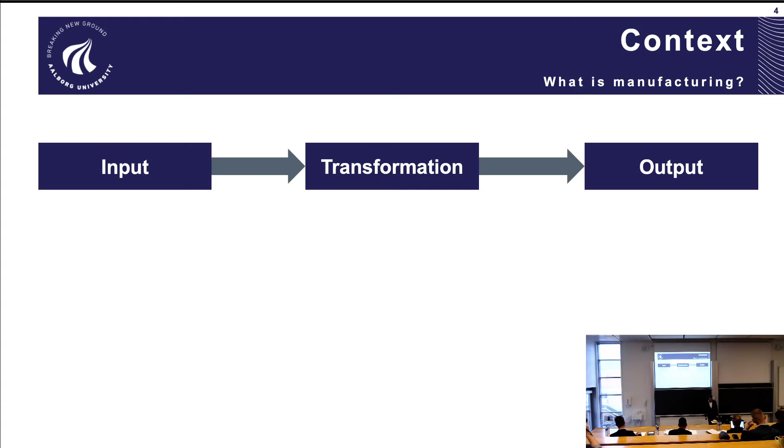At its core, manufacturing is just the transformation of an input into an output. These transformation processes happen all around us constantly. They occur naturally, or we can manipulate them as humans to get to a certain end result that we desire. This particular kind of transformation process that we manipulate is what we call a manufacturing process. These manufacturing processes take an input in the form of materials or components, and transform them into parts or products.

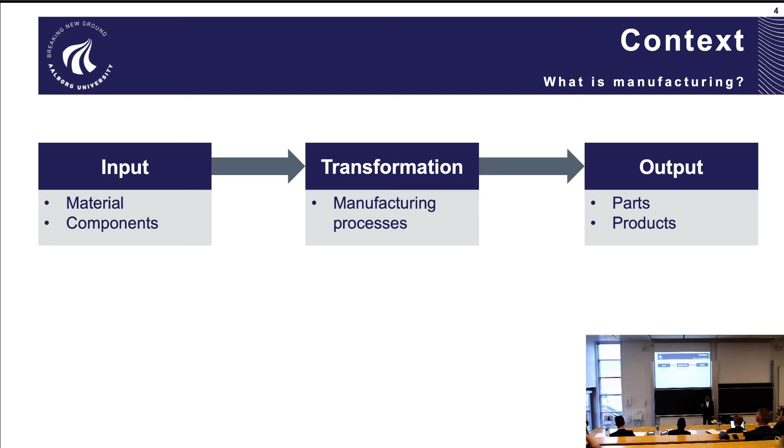And an example of this can, for instance, be: the end result that we want out of this is a set of Lego bricks, or a collection of Lego bricks of various colors. In order to get there, we need an input. In this case, our input is a set of polymer granules. And these polymer granules are basically plastic pebbles, fairly small.

We put those into an injection molding machine here. We heat it up, we put them into an injection mold, basically, and then we cool it down, and then we have our final Lego bricks afterwards. So the actual injection molding machine, that's the equipment that carries out our manufacturing process, while the actual process itself is the heating and the cooling and the shaping of our materials.

And in some cases, like this, the injection molding machine is considered a somewhat advanced piece of machinery. There are obviously more advanced pieces of machinery out there, but there are also far simpler pieces of machinery. And these manufacturing processes can definitely be carried out by very advanced machinery, but they can also be carried out with very simple tools done manually. So for instance, when you assemble a chair with a set of screws and a screwdriver, that's also a manufacturing process, and it's a fairly simple one.

But when we are looking at more complex products, we're going to eventually need more advanced machinery, more advanced techniques in order to get the level of quality that we actually desire of our product, and to actually be able to manufacture the product with the technology that it needs. And in certain cases, we'll also need more than just one transformation process, because one transformation process can transform one input into another output, but we might need to go more steps to actually get there in the end.

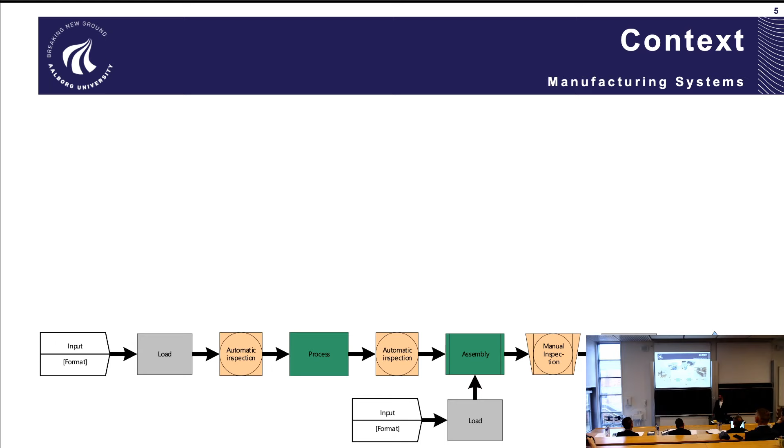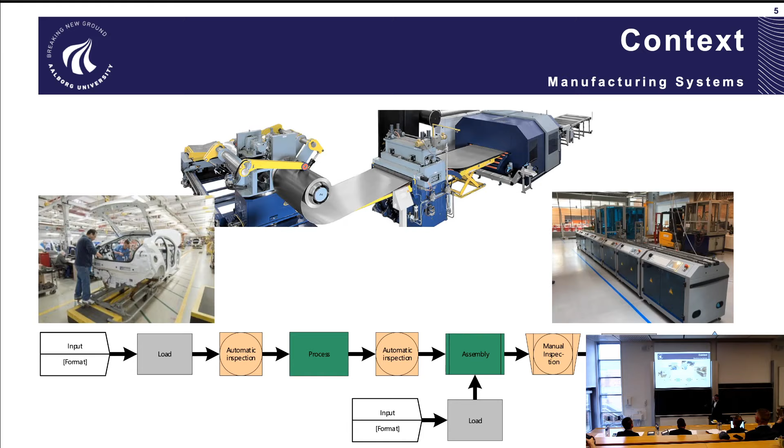And that also means that each of these functions can be carried out in various different ways. So there are various different physical entities that can carry out a specific process. And that means we get a lot of different physical instantiations of manufacturing systems. They can look in a lot of different ways. So these are just a few examples of some of them. The one at the top here is a very integrated one, where we basically have a roll of metal with various operations being performed after it's been spooled out to get to our end product, which is some sort of new shape, new product.

We have an assembly line here, which is a combined manual and automated assembly line, where we have some automated movement of the actual car chassis, but we have some manual work done on it as well. And the last one over here is the manufacturing system that we have at our lab, right over in Fibigerstræde 14, so you can actually see that afterwards. But this one is specifically built with some fairly advanced technology in order to allow us to move things around in it and to change the actual capability of it. So this one, we can actually change the shape of ourselves, whereas the other ones are slightly more locked down.

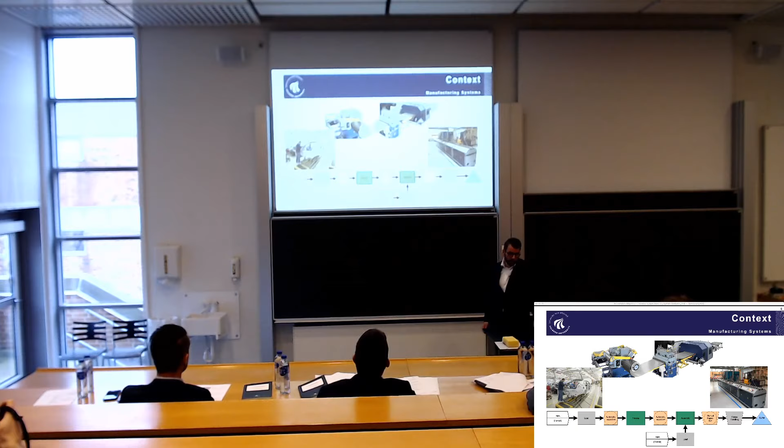But the key is that the manufacturing system is actually just simply the physical equipment that carries out these operations that we actually need to finish our product, or to get the product that we need in the end. And there are huge varieties of these, obviously, more or less complicated manufacturing systems.

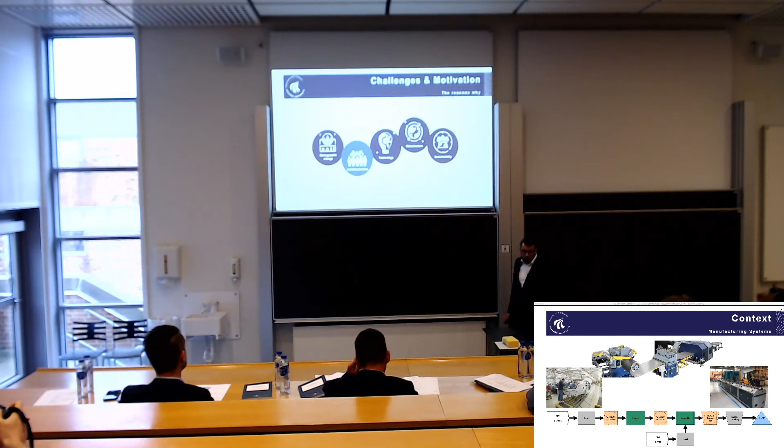But why even work in manufacturing? Why even work with manufacturing systems? And there are a lot of reasons why, actually. I'm not going to go massively into the statistics, but according to our statistics for Denmark, a lot of our GDP is actually generated through export, and a lot of this export is generated through manufacturing. So it is a fairly important field in Denmark specifically as well.

We also have a lot of people employed in the manufacturing industry, and with increasing outsourcing, well, this number is starting to dwindle a bit, and we'd really like to keep manufacturing in Denmark as well, because we are actually pretty good at it, but we obviously want to be even better to keep the jobs here as well and keep all the industry in Denmark.

And for the challenges and motivations that I've considered for manufacturing systems or for manufacturing in general, these are 5 broad categories that I've been looking into a little bit. I'm going to go through all of them very briefly, and then I'm going to focus on the one that I've actually been working on, which is the highlighted one here with individualization.

But the demographic change, to start there, well, we're seeing people are living longer, obviously, that's a good thing, but that also means they work for longer as well. That means that we have more supporting tech and more assistance that the workers will eventually need. It also means that re-education will become more and more important in order to get people to work different jobs. As the job functions start to change, we need to re-educate them as well so they can carry out their tasks.

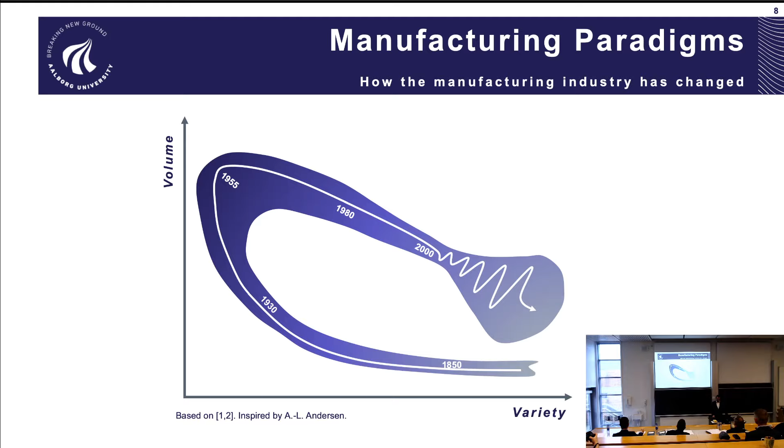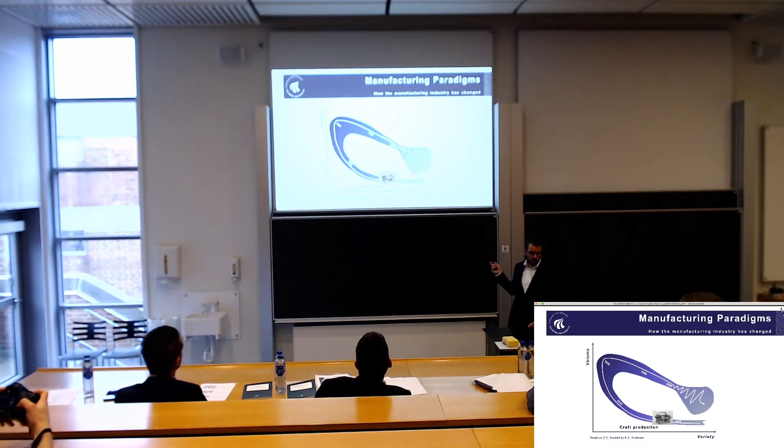This graph basically shows how the industry has changed based on the variety and the production volume. The production volume is the amount of products that are being put out, essentially, the number of products that we actually manufacture. As we start down here in the 1850s, that's quite a while ago, that's where we initially had craft production. So that means we had a very high variety, but very low production volume.

And that's because the people who actually worked this craft production system and actually manufactured the products were very, very specialized workers. So they honed their craft, they were actual craftsmen, they spent a lot of time specializing and learning their actual craft.

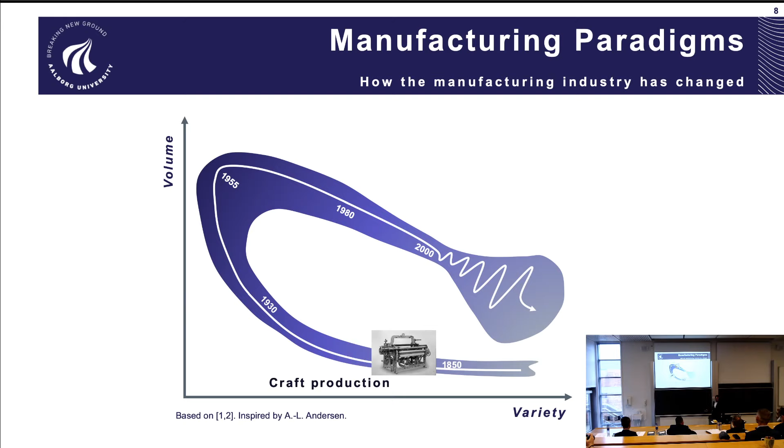But as the population grew, we needed a higher production volume, and that moved us on to the actual mass production era. The mass production era was where we started to standardize more components of our products. We started to be able to manufacture these products much, much faster because of the standardization. So we started to replicate our essential products and started producing more of the same rather than making a unique product for every single person.

And one of the things this is usually attributed to is the Ford Model T, where they built one of the very first automated manufacturing systems or production lines, where they had automated conveyors and a lot of people carrying out repetitive manufacturing processes in order to churn out a lot of near identical cars, basically.

And this manufacturing paradigm is basically still in use today. We still see it at car manufacturers as well. They have introduced a lot of new technologies to be able to manufacture more variety, because we are starting to see this trend towards decreased volume and increasing variety again.

And what we're moving into now is actually the mass customization paradigm, where we have a collection of products that we basically want to be able to customize to as many people as possible. That also means that we want to be able to parameterize the actual needs or the actual features that we have. We need to know exactly how we can change these features to fit various people or various groups of people, essentially.

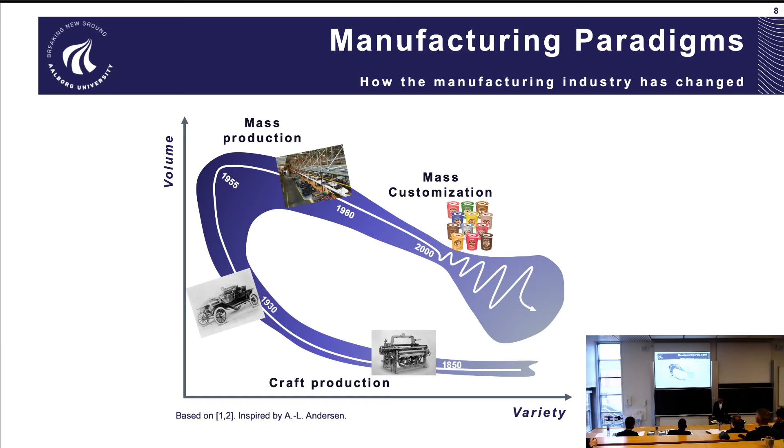And in this case, for mass customization specifically, we want to be able to combine the economies of scale with the economies of scope. The economies of scale is what we've gotten from the mass production era over here, where we are able to manufacture so many products that we can make them very, very efficiently. The economies of scope is basically introducing more variance in order to meet the demand.

So we want to be able to combine these two and get the most of it as much as possible, at least. And for each of these paradigms, there are some types of manufacturing systems that work with each of them. These have been developed to be the most efficient within their specific paradigms. The two I'm going to be focusing on today are the dedicated manufacturing systems, which were developed for the mass production era. This is where we have a very low variety, but very high efficiency. So they're basically dedicated to a few product variants or maybe only one.

Then we also have changeable manufacturing. This is basically an umbrella term covering a number of manufacturing systems that have various kinds of technologies. But this basically means that we can change the manufacturing system to fit our specific needs. And changeable manufacturing is essentially what we're hoping to achieve with this whole work with manufacturing system platforms and everything.

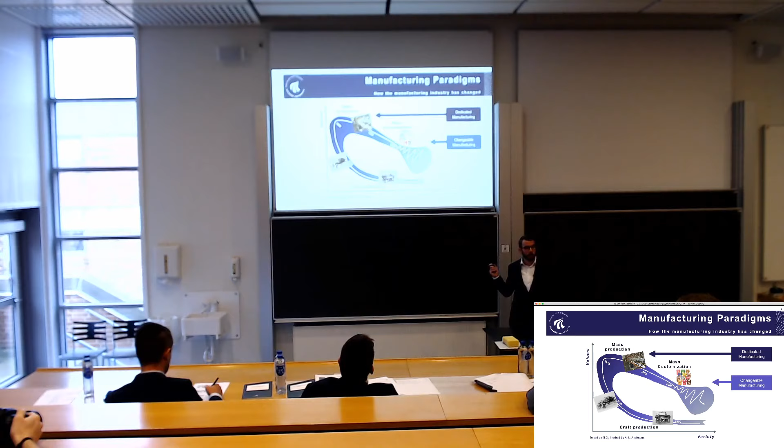So just a little bit more about these types of manufacturing systems. The dedicated manufacturing system up here is very high efficiency, very low variety. So very few variants, but we can produce a lot of them. An allegory to this is, for instance, the ratchet ring wrench, which is suited for just one task, but it's very efficient at it. You don't even have to lift the wrench to carry on with your operation, but it only fits that specific type of nut or bolt.

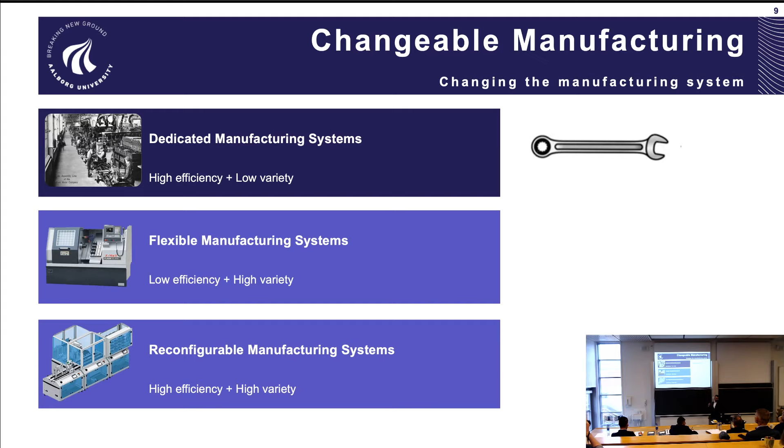For the flexible manufacturing systems, we have comparatively low efficiency, but a high variety. So we can do a lot of different tasks, but it doesn't do any of them very efficiently. So we have a lower production volume output from these types of systems, basically. An allegory to this would, for instance, be the adjustable wrench. You have to lift it every single time you make a turn, but you can also adjust the wrench itself to fit a number of different bolts or nuts.

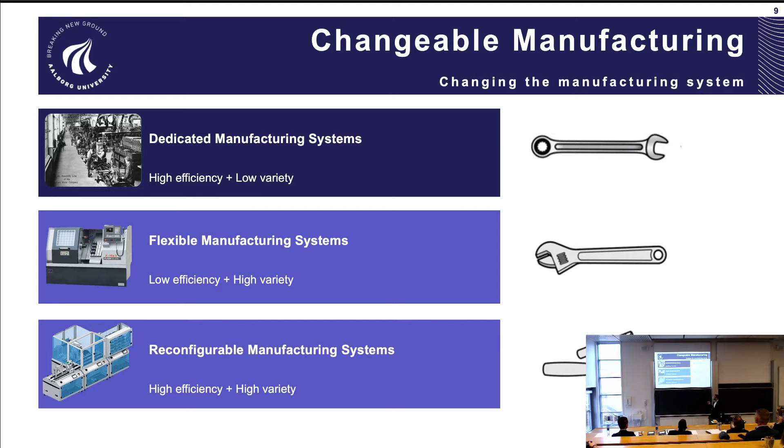And the reconfigurable manufacturing system has a very high efficiency and a very high variety, essentially. An allegory for this is the socket wrench, because like the socket wrench, the reconfigurable manufacturing system allows us to change various components of the system itself. So we can exchange components of the socket wrench to make it fit various things, and it's still very efficient at what it does. The same goes for the reconfigurable manufacturing system.

And this might make it seem like the reconfigurable manufacturing system is the best solution in all cases. That might not necessarily be true, because if you don't need the variety, why bother developing a reconfigurable manufacturing system if you only have one product anyway? So you still need to scope in and figure out what sort of changeability, what sort of changes do I actually need for my manufacturing system. Because it does come with a high cost to develop this. It takes a lot of time. It's still not easy to do, but we're trying to get there with all this research into reconfigurable manufacturing systems.

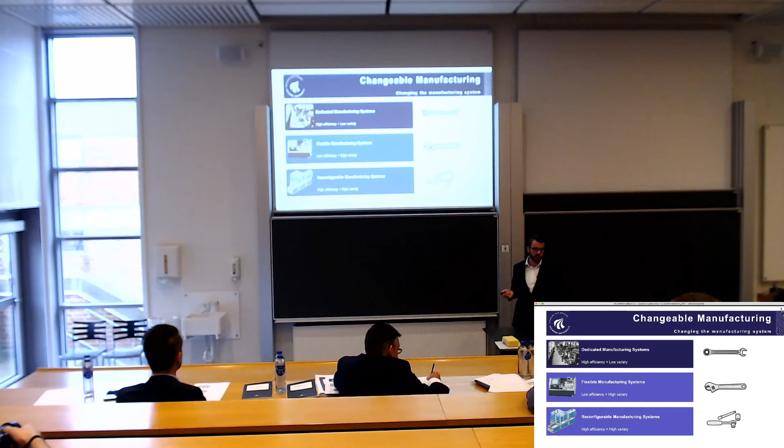And so these are just two of the types of changeable manufacturing systems that we're considering, and this is what I'm going to be talking about today. What we're hoping to achieve is these kinds of systems through platforms. I've mentioned platforms quite a bit, and now we're quite a few slides in, and I haven't actually told you what platforms are. But platforms are fairly simple. It's about locking down features in the product. So you answer these two questions basically: What in my product or my system can I actually change? What am I allowed to change? And where do I allow variety and where don't I allow variety?

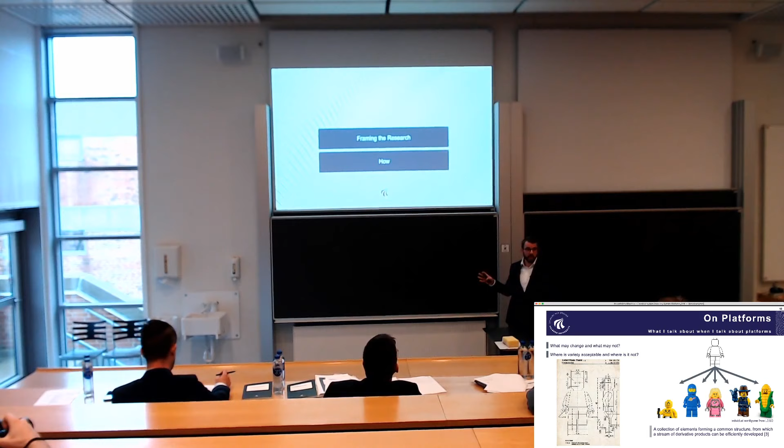Now we're moving into what I've actually done. This is some of the context, some of the first chapters in my thesis, essentially, where I talk about the background for it. But framing the actual research should give you an idea of how I've approached this problem overall. And it should set up the specific questions I've tried to answer a little bit more precisely, essentially.

So first off is the research objective itself, and that is basically to create and apply methods and tools for identifying, developing, and documenting manufacturing system platforms. And the outset I've taken to this is that it should be through commonality and standardization, because that is very important to platforms, that we know what our common ground is and that we can standardize this common ground. The specific approach I've taken to this is something called design science in information systems research. It's basically a framework for conducting research in information systems with a design science perspective.

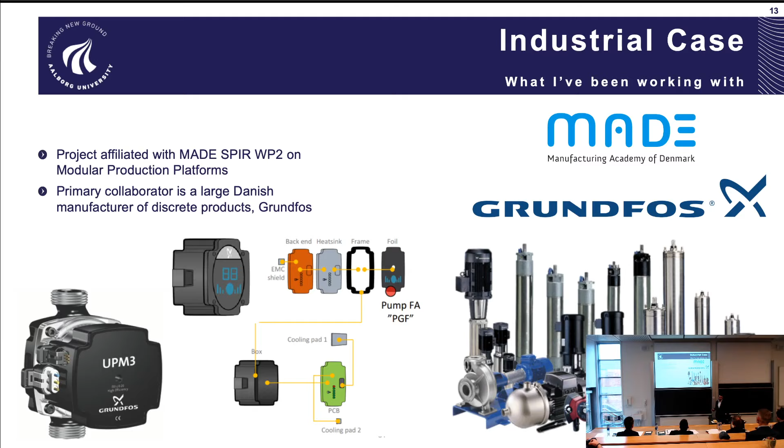Well, my project as a whole is affiliated with MADE SPIR Work Package 2, specifically on modular production platforms, which is very much what I've been working on. And my primary collaborator has been Grundfos. So they're a large Danish manufacturer of discrete products. And in case some of you don't know what Grundfos does, they basically make pumps, to put it short. And they're pumps both for the private consumer, but also for industrial applications of a huge variety of sizes and applications.

Obviously, I haven't been able to look at every single one of them. I've been looking at a certain subset of them. We started off with mainly small circulation pumps, specifically the control boxes for circulation pumps. And this is one of them, for instance. So that's about the size we've been working on, the manufacturing of these. And there's been a variety of other products included as well, but this has been one of the main ones throughout the entire process.

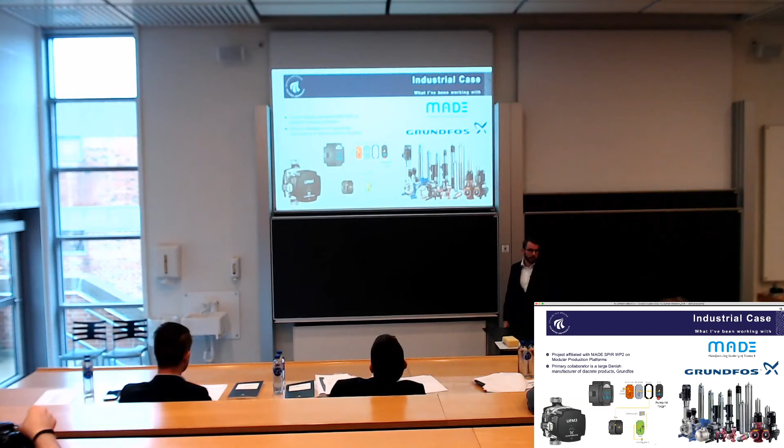With that, let's move on to the actual research questions themselves. So I've set up 3 research questions. For each of these research questions, there are 2 to 4 sub-questions, basically. And then I've written a number of papers, and each paper answers 1 to 2 of these sub-questions, and thereby they address the overall research questions as well.

So the first research question is basically, how do we develop manufacturing system platforms? How do we document them? And how can we use concepts from software systems in order to get there? So that's what I mentioned, that we need to take inspiration from somewhere in order to go further. And which challenges arise there, obviously.

For research question 2, it's basically about how can we classify manufacturing systems and their processes in order to get potential platforms out on the other side. I wrote 3 papers addressing that.

And for the last research question, it's basically on how manufacturing systems can be developed by taking into account the existing production landscape. So manufacturers, they always have existing manufacturing systems, and we don't want to necessarily scrap that. We want to make as much as we can of the actual experiences and all the machinery, equipment, and tools that they have for that.

And 5 of these papers are published. The last one is in press, so it's still not quite published yet, but it should be fairly soon. That was a very quick run through of the actual approach I've taken.

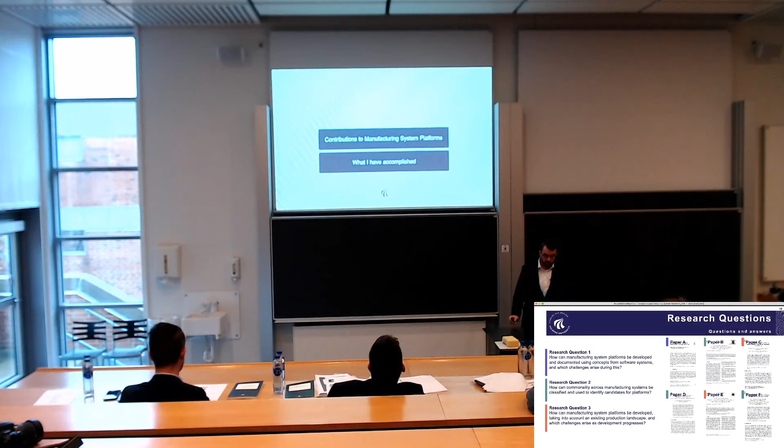So now we'll get into the things that I've actually been working on in the project, or the contributions that I've actually made. The papers themselves, the way they were set up on the previous slide, they were set up chronologically, and that's the same way they're included in the actual thesis itself. In my presentation, I've taken a slightly different approach because I thought this would make a little bit more sense.

But the first one we're starting off with is the actual challenges that we've seen when we've been working with platforms. So I've been working on platforms for quite a while. It actually started during my master's, or actually my second semester on my master's. So it's been ongoing for the last 4.5 years. And through this entire process, there's been multiple projects ongoing as well.

So the first project that I started working on was basically trying to figure out what are platforms actually. Can we use them for anything? Because it's something we've heard about, and it seems like it could be useful. But what are they actually? And how do we utilize them? How do we actually develop them?

In the second project, we started looking more into the actual identification of potential platforms. So we had a bigger scope, we had a bigger group of people that worked together on trying to find out which parts of our manufacturing system should be platforms, how we document them. We started including some co-development as well, since we included people from both the product development department and the manufacturing development department, in order to get these two things aligned with each other, because that is very important when we're talking platforms. We need to have these two departments aligned to be able to actually manufacture the things that the product development team makes.

And then, of course, we need to somehow develop and apply tools in order to create these examples that we actually need, so we can communicate to people how they're actually supposed to develop manufacturing system platforms. So these are some of the challenges I've been trying to address through this whole project.

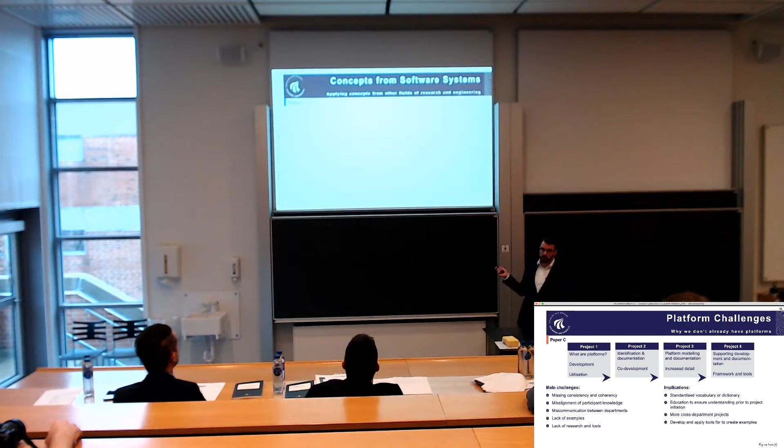So one of the first things I did, in order to get a better understanding of manufacturing system platforms and how we could attack this, was to look into software systems. And you might think, why even care about software systems? This is not what I'm working on, basically. But the simple reason is that software systems are quite a bit further than we are. They can make iterations of systems significantly faster than we can, because we are very much tied to physical equipment still.

And every single time we need to make a change to the manufacturing system, well, we have quite a significant lead time. So if we want to get through development processes quickly, we've got to start looking elsewhere to get some actually tested and applied methods in order to do what we're trying to do. And that's what they're really good at in software systems. So that's why we've been taking some inspiration from them, basically.

One of the things that we looked into was architecture; they talk a lot about architecture, and we do in manufacturing systems as well. We're not going to go massively into architecture, but one of the concepts that we've taken from there is something called views and viewpoints. The viewpoint is basically a way to look at a specific system. The view you get out at the end is basically the resulting look at your system. So a view is to a viewpoint as a program is to a programming language, essentially. So the viewpoint is a collection of ways to look at something. It's basically an outset or a perspective onto something.

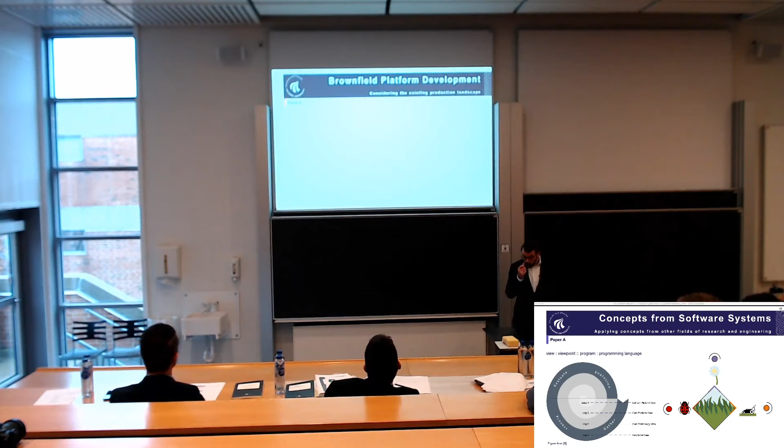This is one we developed in order to actually create these views and these viewpoints that we believed we needed in order to create platforms and in order to document platforms. A key takeaway from this is that it separates function and technology. So we need to make it clear that there's a difference between the actual function that we need to carry out and the way we carry out the function. And this was crucial in order for us to actually be able to compare all of our manufacturing systems that we have as well.

But moving on a little bit, talk about Brownfield platform development, because it's also fairly important to the manufacturer that all the work, all the systems they already have, they don't just go completely lost. And that's what Brownfield does. It takes into context basically the existing environment where you're actually developing your manufacturing system platform, as opposed to Greenfield development where basically everything is up in the air. You have no limitations. Essentially, you can develop almost whatever you want. Obviously, there are advantages and disadvantages to both these approaches. But Brownfield development in particular is interesting because we want to be able to reuse all the equipment that we already have.

So the first step to this is essentially a prerequisite to actually starting this whole process. It's not actually part of the Brownfield development approach that I've outlined, but it's the assessment of changeability requirements. So what sort of changeability do we need? How much flexibility do we need? Do we need reconfigurable manufacturing systems, or do we need something else entirely? That's a prerequisite for starting this. It's still included here because it is fairly important, but that's not what I've been working on.

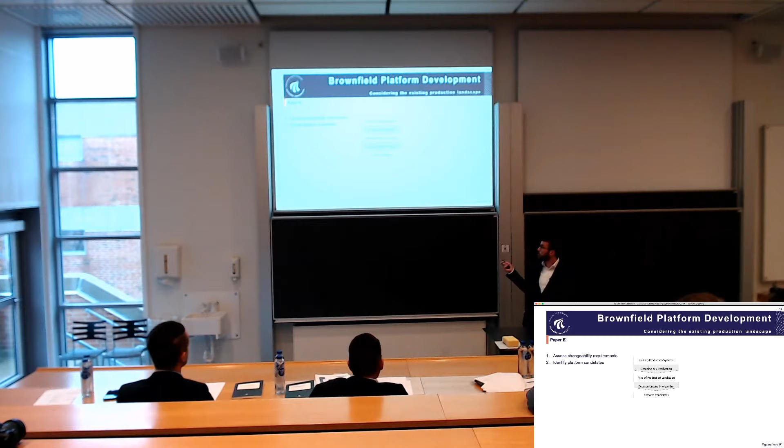After that, we have the identification of platform candidates. So these are potential platforms based on your existing manufacturing system that you could keep working on, keep developing into platforms and base new manufacturing systems off of. That's also a fairly simple process here. You take your existing manufacturing systems, you group them, you classify them, then you end up with a map of your actual production landscape. Based on this, you apply some decision criteria and algorithms in order to identify these appropriate platform candidates.

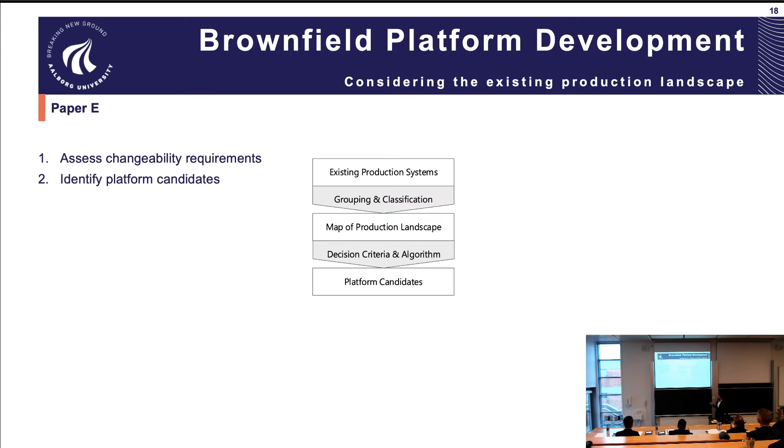Once you've identified these candidates, well, you go through another series of steps to keep developing them, of course. So for each of these next 4 steps, from 3 to 6, you basically carry those out for each individual platform candidate that you've identified. And if for some reason you find out during step 4 that this platform candidate doesn't actually make sense to keep developing anyway, well, you can still just scrap it at that point and move on to the next candidate instead. But we go through, basically, we define the essential functions of the candidate. That means what is it actually supposed to be carrying out.

Finally, we start with governing and maintaining all these platforms. That's what you do for basically all of your platforms, the whole collection of them that you have. Because we need to maintain them, make sure that they're up to date and that their existence is communicated out elsewhere. And all of these are obviously not rigid prescriptions, they're operational guidelines, so that means there's still some need for flexibility in these. So you can move steps around a little bit, or skip a step maybe and go back to it later on.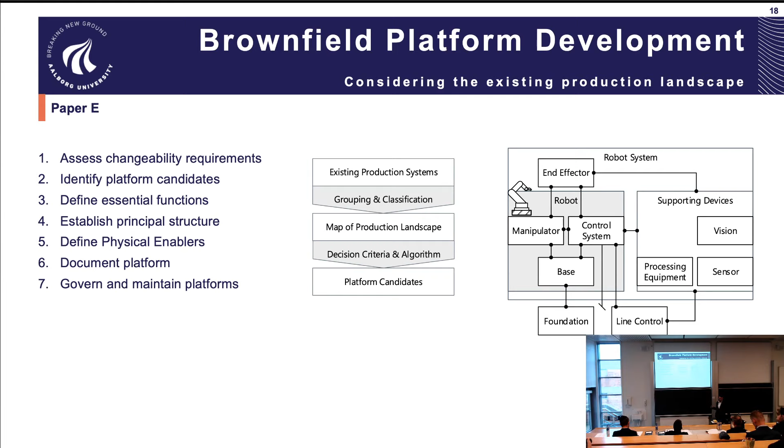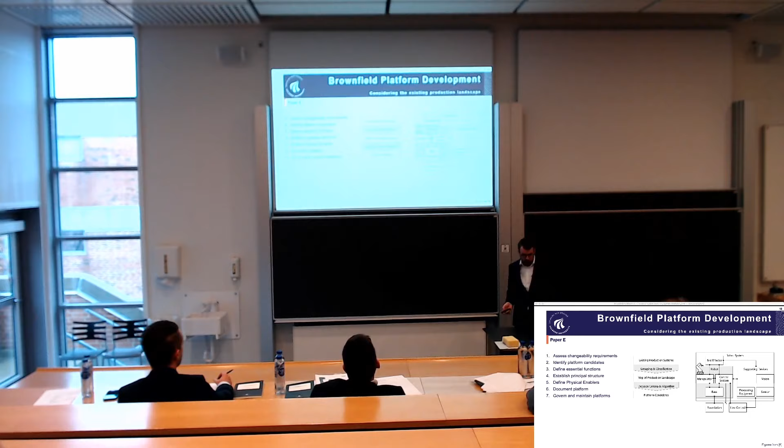But the reason we want to do this brownfield development is essentially that we want to be able to incorporate the experiences from experts and the people who've actually developed the systems and worked on the systems in order to help the acceptance rates of manufacturing system platforms in this company. This one is one of the ways that we've been trying to actually accommodate this step with grouping and classification, because the thing that I started looking into more and more was the actual identification of platform candidates.

So I created a consolidated classification scheme, basically for manufacturing system processes or for production system processes, but including the manufacturing processes themselves, also material handling processes where we move stuff around. It also includes some other processes such as test and inspection and control and planning, but we're not going to get massively into that today.

The way I did this was basically by searching through a lot of the existing classification schemes that I could find, basically as many as I could find, and then consolidated them into one classification scheme in order to create this comprehensive classification scheme that I could use to classify the processes in manufacturing systems.

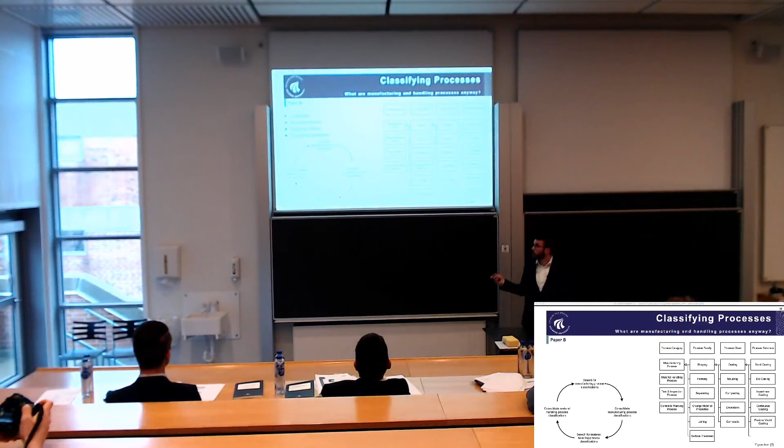The end result, as of my paper written, we ended up with these 4 main categories. We had 16 different process families. So these are split up into different categories. Then we have 53 process classes and 232 process subclasses. And this one is going to keep growing as more processes are added to it and as more work will be put into the test and inspection and control and planning processes, because that's still something that needs to be looked into.

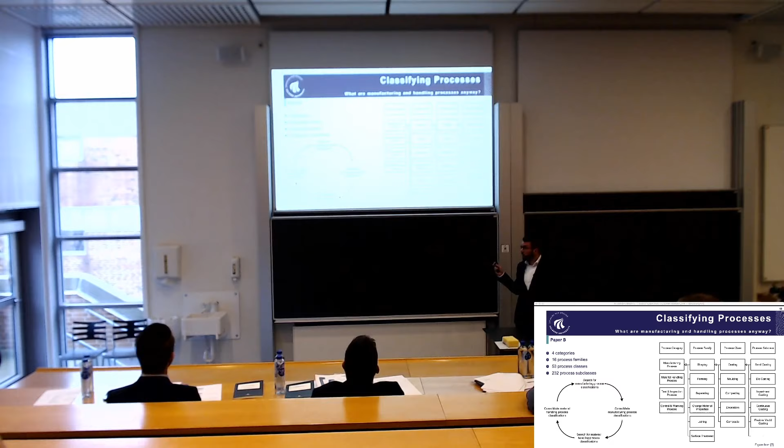But this is just one way to actually describe a part of the manufacturing systems themselves. There's still quite a bit more to it than that. There are a lot of other characteristics that we can't capture just by looking at the processes themselves. So that's why I developed a classification code to actually document or to capture these characteristics.

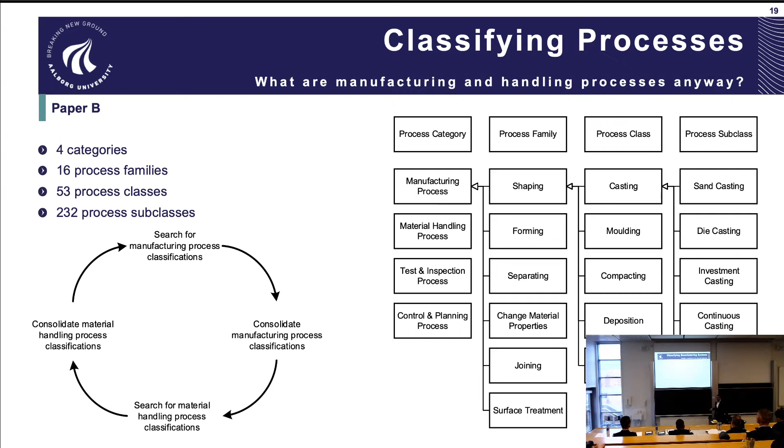And what we're looking at here is a classification coding scheme which basically describes the entire manufacturing system, both on a system level and on a cell level. So that means the system as a whole, but also the individual stations that carry out the manufacturing processes. And we look at all these things both with a physical perspective and a logical perspective. The physical perspective means the actual ways things are carried out, the actual equipment itself, whereas the logicals are more intangible. So that's where we describe certain other things that might have driven the design of the actual manufacturing system itself.

This is just a small example of it. The actual code itself consists of 25 digits, where you use one digit to represent a specific characteristic of the manufacturing system. So in this case, the manufacturing system was designed because we had a new product. So we need a new manufacturing system to make this new product. The product itself is fairly small and the production volume is high. We have hardware variety in it, so we need the manufacturing system to be able to manufacture products with a different hardware variety. And this is just a shorthand for the location of the actual manufacturing system itself.

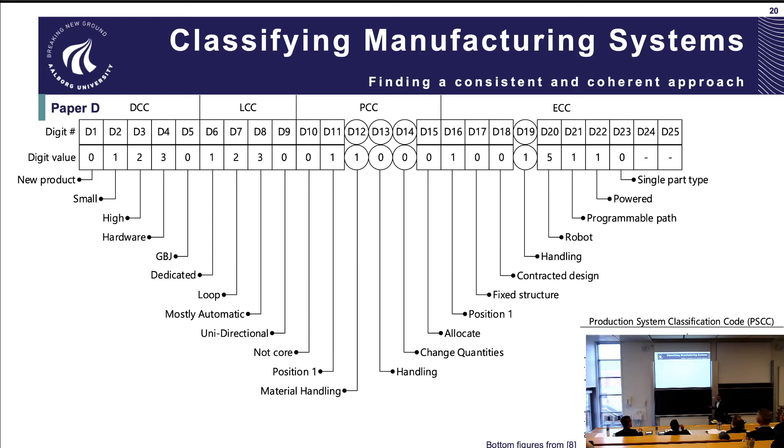And the classification code basically continues like this. We keep adding stuff to it in order to actually describe. So this basically describes the system, the layout of the system. Then we move on to describe the individual processes of the system. And finally, we describe the actual ways this specific process is carried out. And we keep doing this, adding more and more processes until we have basically an entire block of code that describes the entire manufacturing system itself.

So when we have multiple of these, I don't know if they can be seen because of the angle, but when we have more of these code blocks, we can start comparing them to each other. And by comparing these, we can start to locate the good solutions or the bad solutions and figure out what actually works in our manufacturing systems. Where have we tried to carry out this process in various different ways? And in which cases has it actually worked properly?

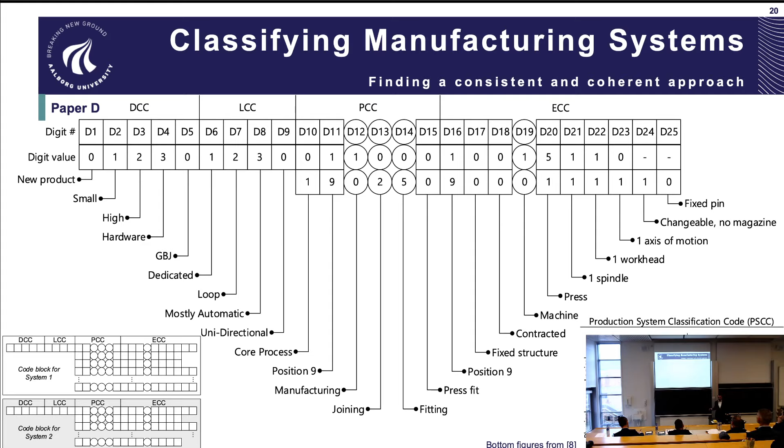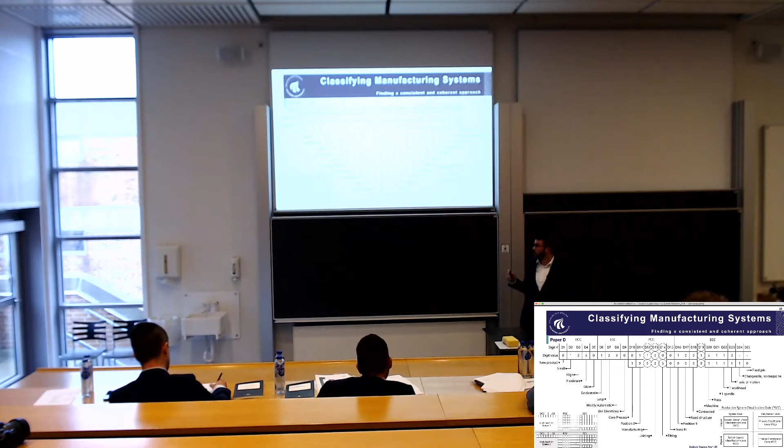There's a lot of applications to this, but one of the key things is that it's very, very difficult to implement in this current state as well. We need to somehow make it a little bit more user-friendly to get a higher acceptance rate on it. It does take time to implement this, but it can be a very powerful tool as well.

Actually, we tried using it in one case as well, where we took 8 manufacturing systems and coded them according to this classification scheme. Then we used 3 drivers: the frequency of a process or an enabler, how often they occur; then the prevalence, so how many systems they actually occur in; and a ratio between how many different processes an enabler carries out and how many instances there are of the process, and so on.

So with that, we got basically a ranking of all the processes and the enablers that were used in the manufacturing system themselves. And from this ranking and from these scores, we can maybe recommend some potential platforms for the future. These are just 3 of the ones we looked at basically. The allocation process up here, which is a material handling process, because it basically scored top in almost everything.

We also looked into the robot itself, because it is fairly frequently used as an enabler, and it carries out a lot of different processes as well. We also have the tester, which is used in every single manufacturing system, but there's a lot of different instantiations of this tester, and we want to be able to standardize the way this tester works, basically.

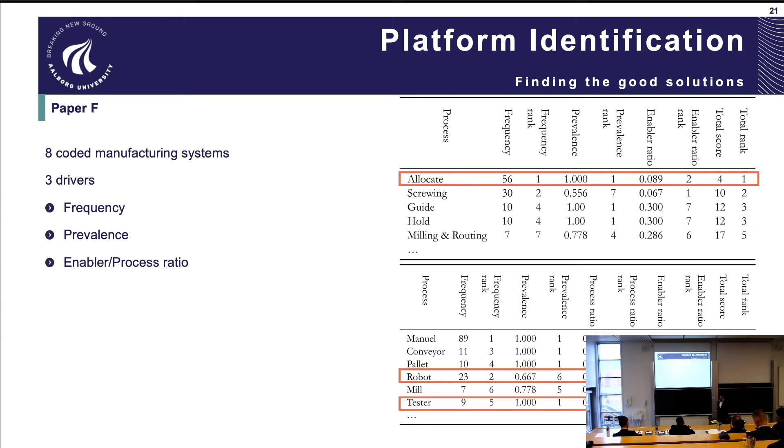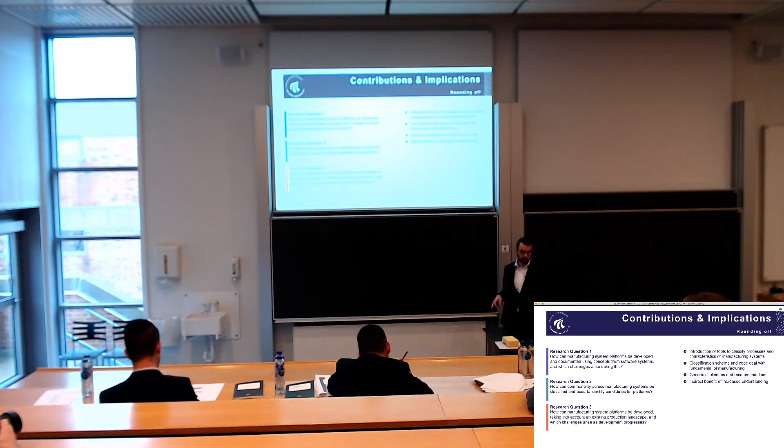That was the end of the actual contributions part, so I'll be moving on to the concluding remarks, because we are nearing the end now. I've tried to answer these 3 research questions, obviously, through my 6 papers. And I think I have gotten around that pretty well. There are some other conclusions that can be drawn based off of the work I've done as well. So one of the key aspects that I've done in my research is basically the introduction of tools to classify the processes and the characteristics of manufacturing systems. That's one of the key contributions that I've made as I see it.

And through customization of this scheme and of this code, you can basically apply it to almost any manufacturer. It doesn't have to be a large manufacturer, it doesn't have to be a manufacturer manufacturing pumps. It can be basically anything, because it is supposed to be flexible in this manner. Because they do deal with the fundamentals of manufacturing, actually. So they're not tied to any specific industry or any specific manufacturer.

We also came up with some generic challenges and recommendations that you should consider before you start actually developing manufacturing system platforms, because it is a lengthy process, it is a costly process. There's also an indirect benefit of working with manufacturing system platforms, and that is to get a significantly increased understanding of your actual manufacturing systems. What do our capabilities look like at the manufacturer? And you might be able to get a better grasp on what the production actually looks like.

Future research: there's still a couple of loose ends that could be tied up potentially. This is some of the things that I would like to continue looking into. The first one is actually a comprehensive framework for manufacturing system platform development. This is just an illustration of the elements it could consist of. But yeah, that's basically to make it easier to actually develop manufacturing system platforms, figure out which tools you need in which situations. The process classification scheme itself should also be turned into an ontology.

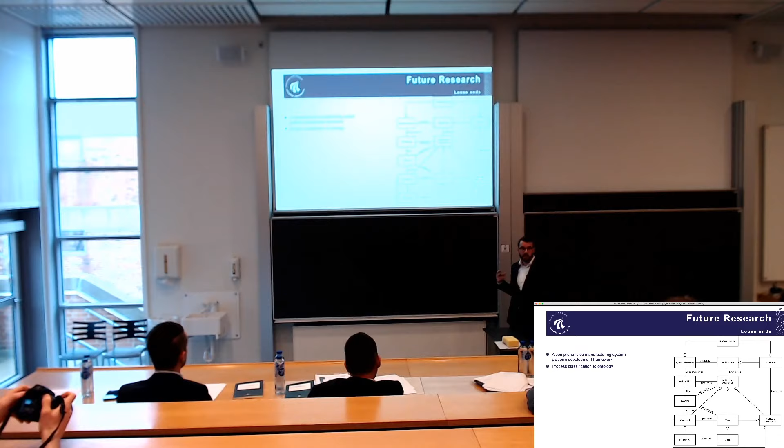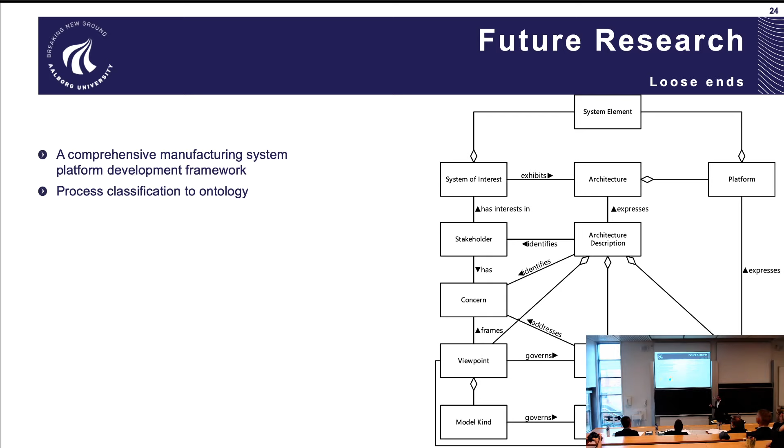That basically means enriching it with certain attributes, certain properties, so we can describe our manufacturing system in more detail based on the classification, and potentially develop some method for saying something about producibility or manufacturability of new products. There's also an app for the actual mapping and the classification of manufacturing systems, on whichever platform that we want to, basically, and also an algorithm for actually using this classification code to identify platform candidates. And the actual app and development on this is the subject of a future project as well. So there's going to be some work on that for sure.

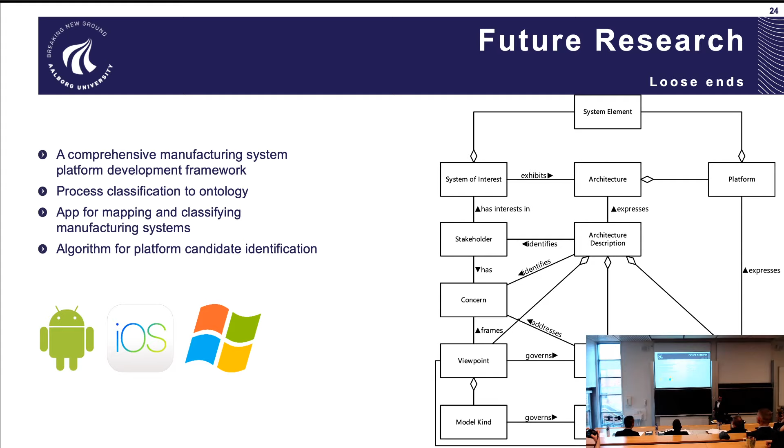And last slide, a few acknowledgements. Obviously, I'd very much like to thank the assessment committee for being here today and for reading through my thesis and giving me feedback on it. Obviously, Professor Mats Jackson from Jönköping is here, and Arne Bilberg, thank you very much. And Simon as well, the chairman and the moderator here today. I'd also like to thank my supervisors, without whom this probably wouldn't have been possible. And obviously Bjørn Langland from Grundfos as well, who's been my main contact at Grundfos. I've had a lot of long discussions about all of this as well. And that was actually what I had to tell you about today.